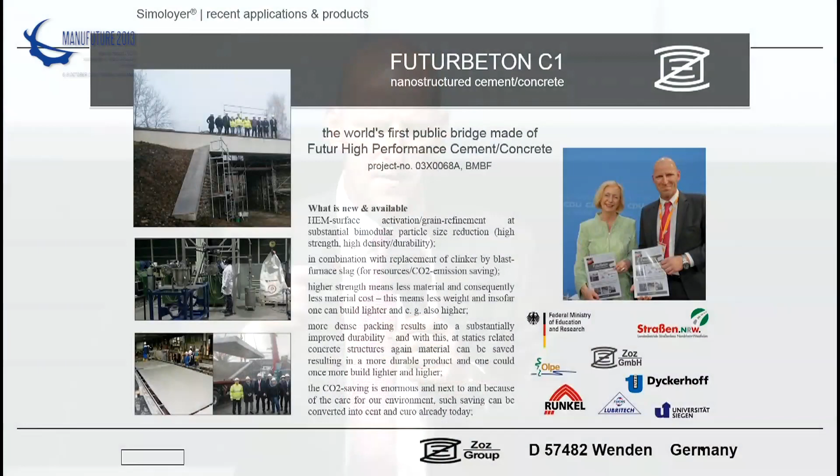Now, to the Zentallium, that is what we call lighter than aluminium, as strong as steel. It's an aluminium matrix material where we are controlling grain size by adding nanoscale carbon nanotubes. That will be the first topic. The second one, this is the high-performance cement, and what you see here on the top picture on the left, this is the bridge that was built in Germany in November last year. On the bottom, this is the plant that we utilize to manufacture these materials, etc.

The interesting thing is this is a BMBF project. I will show you that for 20 years we've been working on these things, but never asked for a project. This is like shooting balloons here and there and seeing, why don't we try. Then once we came closer to something at the end of the tunnel, we went for a BMBF project, and this was a very successful one, and our new minister of BMBF is holding exactly the progress report of this project.

The next one is the H2 on Air. In the H2 on Air project, we are utilizing very little containers for energy storage. There is a nanostructured powder inside, and that absorbs a lot of hydrogen, much more energetic-wise than batteries could do. The next one is the power to gas to fuel scenario, and to this scenario, if we have time, we will come at the end. Excuse me. Now, let me show you,

okay, one more comment. I'm coming from Germany. I love my country very much. I'm a fan of Germany, but let me tell you, I'm also a fan of Europe. This was not planned to be in this presentation, but let me just remind you, as my colleague from Bayer this morning also mentioned, and I was very happy about that, we need to be a strong group in the future. And this strong group needs to be on this planet to be able to survive next to some other large groups that we're going to have. So I strongly believe in the need of Europe. That makes sense. So all that we are doing here already makes sense.

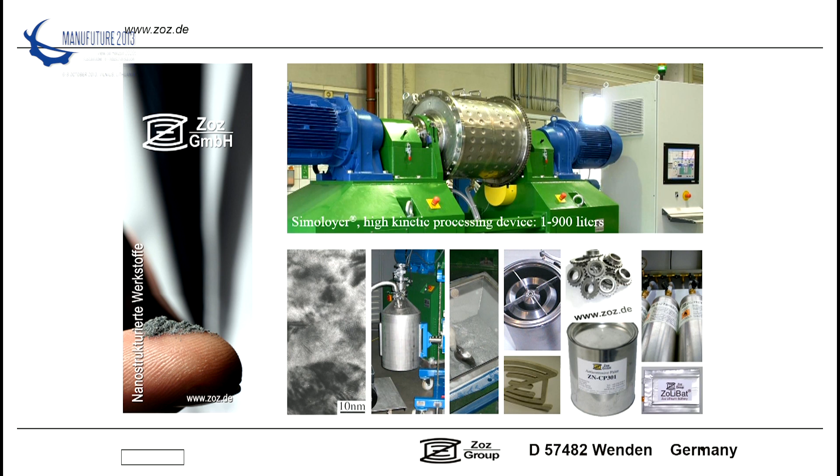This here shows an HSS matrix with a superfine carbide distribution, 10 nanometers. Just to remind you, 1 nanometer represents 4 copper atoms in a row. This is the distance we are talking about. And the grain size we can intentionally create is in the range of 40, 50 nanometers, easily, and in large scale. Then with that, we are doing different types of products, including direct consumer end products. And this I will show you.

In Germany, this became quite popular because we are very much working in clean energy. Germany is the country for the energy turn, and we are talking about energy storage and sustainable technology. And this is called blue energy turn. Has nothing to do, and here again we are talking about IPCC, about the horror scenario of CO2 emission.

For this, I really stand on the other side of the medal, and I tell you, I'm not saying I know everything better than IPCC, but I admit that I don't know. And I believe that mankind, we are not aware of the correlation between CO2 emission or CO2 concentration in the atmosphere and the global warming, the global temperature.

And for those who have other opinions, I mean, we name it Greenland. Greenland, Grönland. So it seems that there has been no ice anyway. And if the entire North Pole would melt away, the ocean wouldn't rise at all. It would go down and come back to the old situation. The North Pole is swimming, by the way, just as a small thing.

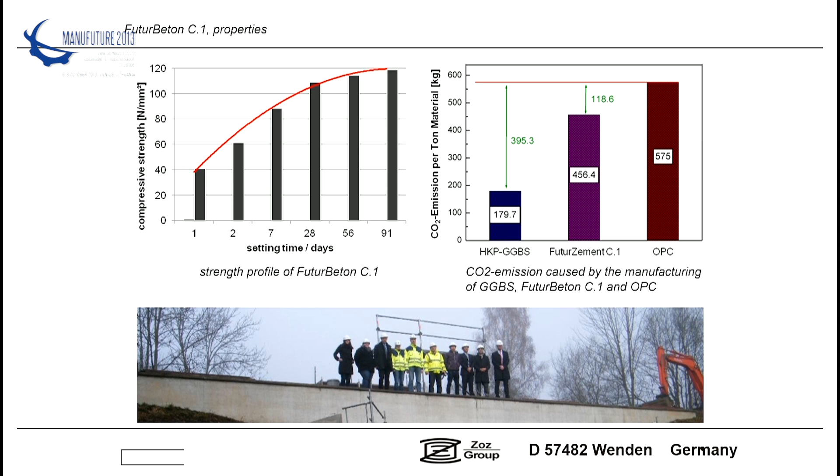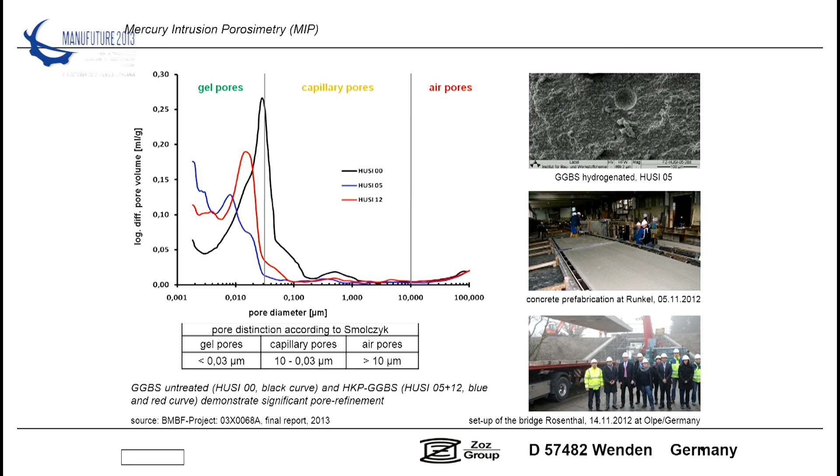The setting curve here: after 28 days, the ordinary material would end around here. This is where we are after the first day. This is the CO2 emission saving potential, which is in the range of 20%. This is the mercury intrusion porosimetry, and that shows that after a few minutes processing time, we are moving from 50-50 capillary and gel pores to 95 gel pores, 5 capillary pores. That means water cannot penetrate this concrete any longer, which is an amazing result for durability of any kind of Autobahn bridge, any kind of building that is in water.

Telling you something about dimension. This is one of my Chinese colleagues. I want to tell you he's not too tall. That means the plant here is also not too big. This is the unit that we utilized for 2 weeks, 2-shift operation, to make all the material for that bridge in Germany. So that is something that really can be done.

The hard facts here, and the hard facts are only what counts at the end. We calculate the numbers, and we are ending up with this 7 here. This 7 is of major importance, and this 7 means 1 ton of concrete will cost €7 more, is 3 times stronger than the conventional material, has almost an endless durability, and saves a lot of CO2.

Now, €7 per ton. Now let's see what the CO2 value actually is. We have €140 per ton total cost of that fraction that we use, and this gives us 395 kilograms of CO2 emission saving. That means here in this process, for every 1 ton of CO2 emission saving, we have to pay 350 euro.

This assumes that our product would have a 0 value, but that is enough. I want to see if only the CO2 emission can pay for the entire product. And it can. It can. So the product actually is free in the end.

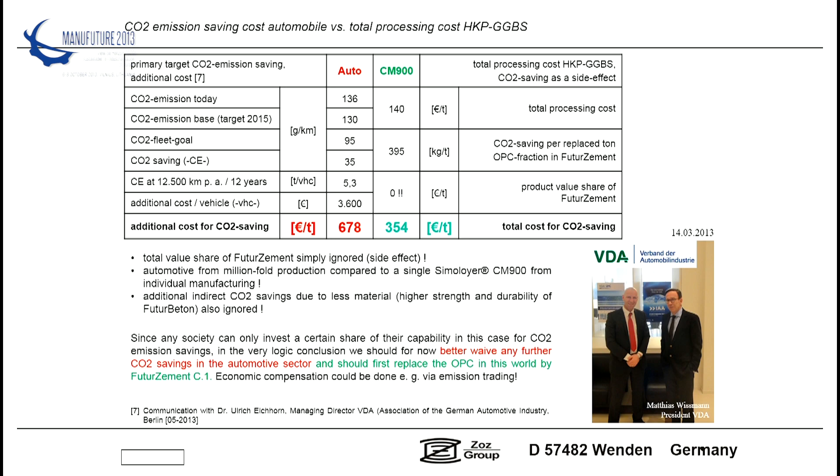And I went to German Automotive, and Dr. Ulrich Eichhorn, who is actually the managing director, calculated for me this number here. This number gives you the amount that the German automobile industry in the future is expected to have their customers pay for every single ton of additional CO2 emission saving. And this is twice the money that we actually utilize.

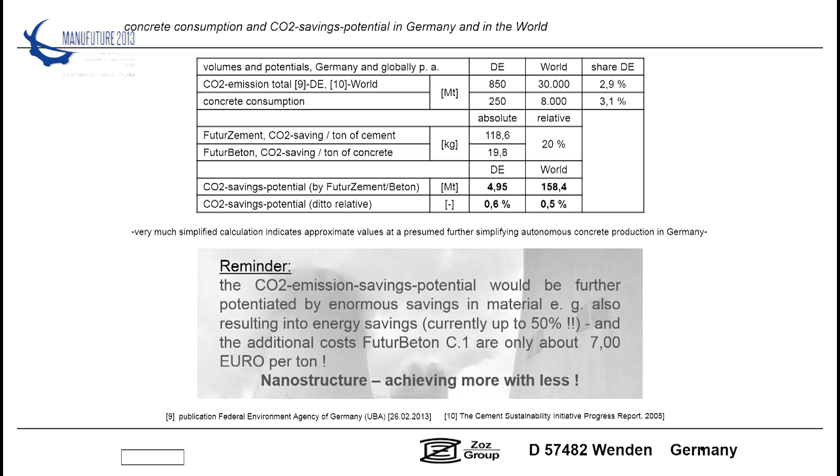What does that mean? That means practically that the politicians would need to go to the automotive industry and tell them, please do not save any more CO2 before we have replaced all the ordinary Portland cement with these advanced materials. So, in total, in Germany we could actually save 0.6, in the world 0.5% of the total CO2 emission, which is really a huge number.

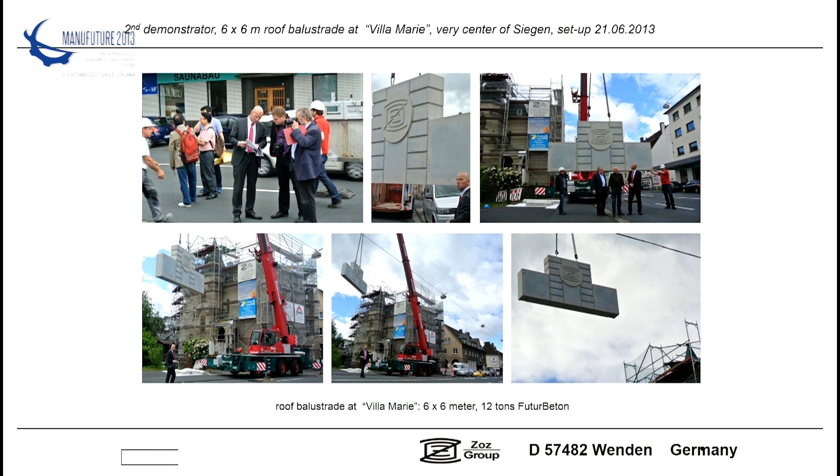We came up with a second demonstrator. This was set up in Germany 3 or 4 months ago. And we are looking at more bridges. Actually, this is my hometown. And within this year, we hope to finalize this bridge here, and then another one over there will come.

So very quickly to hydrogen storage. These are the little tanks. Could you give me 3 more minutes? Thank you. So, new topic now, okay?

So this is hydrogen storage. This is how we can ride our car in the future. What does that have to do with concrete? Basically nothing. But the system, the principle, the technology we are utilizing is almost exactly the same. And this is a tank, and in this tank there is some powder. For 15 years we have made so-called solid-state hydrogen storage materials. These are metal hydride systems.

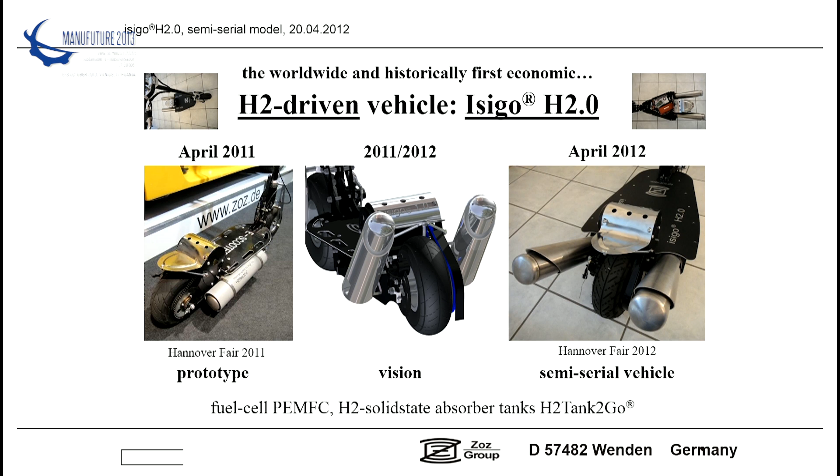And within 15 years, automotive didn't really succeed with that. So we stopped with that a few years ago, and I said to my colleagues, either we stop it altogether, or we have to make a tank. Then you make a tank, you bring your powder into that, and then you realize the market needs more than a tank. So you have to make a vehicle. And then if you have a vehicle, you have to find your customers. So this is the way we are trying to follow that.

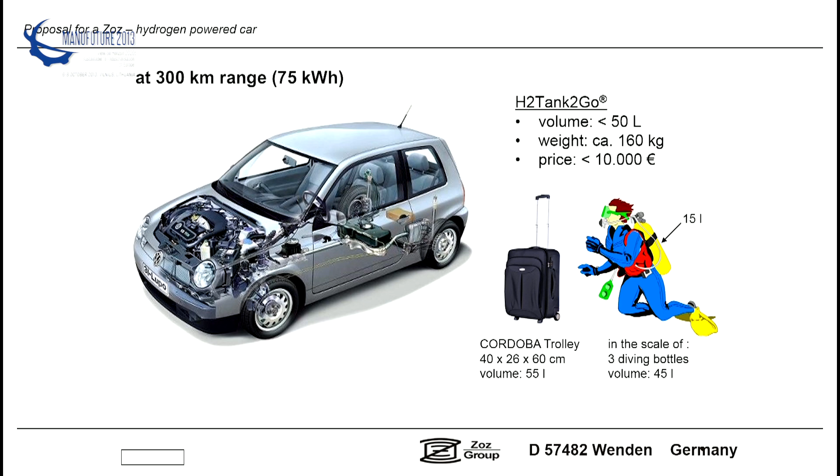We started with very small-scale vehicles, and this vehicle here actually has a range of 120 kilometers. This is a kickboard, right? But with 2 1-liter containers, refueling costs actually €2. So from there we say, okay, let's calculate a car. For this car, we calculate a 300-kilometer range, 75 kilowatt hours. For this, we would need this kind of tank, or we would need 23 of these 1-liter units.